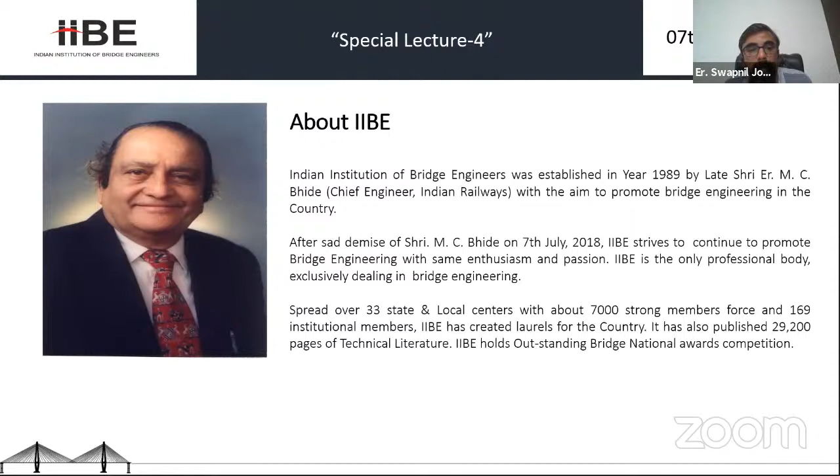Let me introduce our DG, Director General of IIBE, Engineer DG Divte, who graduated in Civil Engineering from College of Engineering, Pune in 1974. Through the 1975 UPSC exam, he joined Indian Railways Service of Engineering as a Class 1 officer and retired as Principal Chief Engineer of Indian Railways in 2011. During his service, he worked on many important railway infrastructure projects, occupying posts such as Principal Chief Engineer of Northeastern Railway and Southwest Railway, Director and Board Member of Konkan Railway Corporation, Chief Engineer of Konkan Railway Project, Chief Project Manager for Tunnels of Mumbai-Pune Expressway, and Project Director of the Katra to Loli portion of the Udhampur-Baramulla J&K Railway Project. Recently, he worked on Mumbai Metro 3, a 33.5 kilometer long, fully underground metro construction project, as CGM.

So we have great support from the DG for all these lecture events happening regularly. Let me introduce our President.

now. So the content of the presentation I am presenting here today: we will take a look at types of stay cable bridges, different types of decks that are used on stay cable bridges, erection possibilities of these bridges, stay cable systems that are being used today, important requirements for such bridges, and we'll also look at the construction series, and then we'll conclude with inputs from all moderators as well.

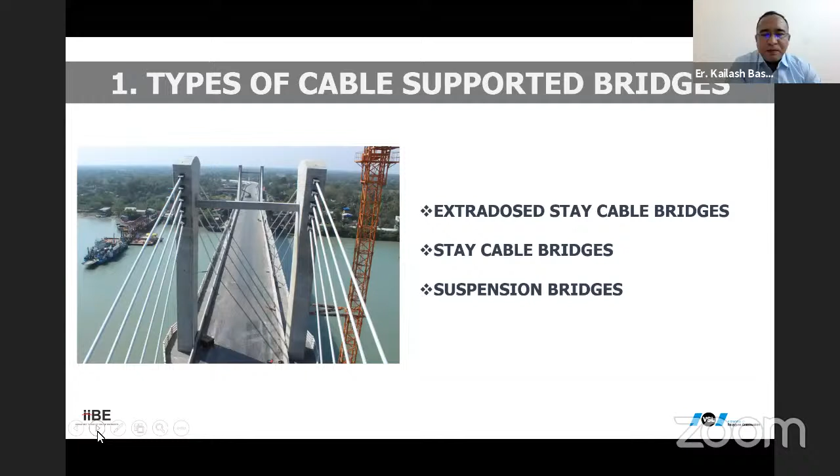Internationally popular is the fib, the most widely adopted standard today: Acceptance of stay cable systems using prestressing steels, fédération internationale du béton. Recommendations for stay cable design, testing and installation from PTI, the Post-Tensioning Institute. The French Interministerial Commission is also in vogue. Recently an IABSE bulletin 17 on extra-dosed bridges has also been published. So this was also nice to move ahead on stay cable bridges.

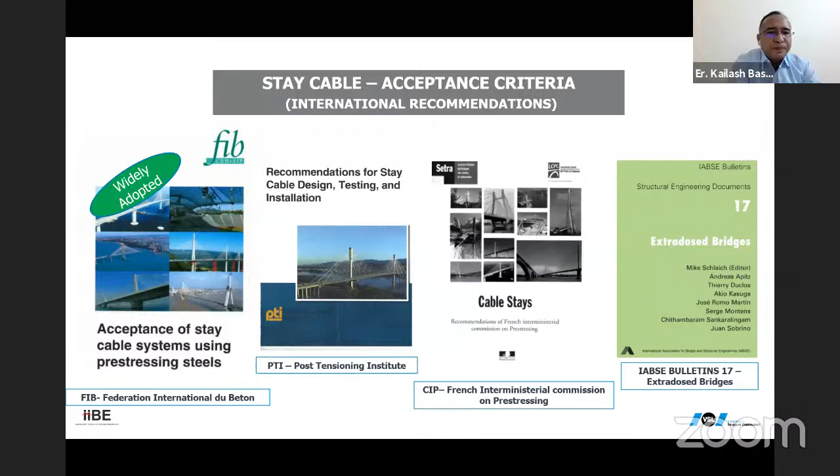Types of bridges: girder bridges, balanced cantilever bridges, which were quite popular for quite some time in the country on river spans, the conventional way of building. Variable depth, internal and external prestressing can be used, but they have a span limitation. Then come extra-dosed bridges, which are in between. They can span a bit longer. The stay cables here are treated as external prestress, maximum stress 0.6 fpu. Constant or variable depth is possible, but they also have a limitation on span length.

Then comes the stay cable bridge. Virtually, it can go quite long; there are more than a kilometer being involved now. After that come suspension bridges, which have no limit, though feasibility of foundations and others must be looked at. Constant depth, there could also be variable depth. For cable stays, maximum cable stress here is 0.45 fpu. Here the cables support the deck; it is not treated as external prestress.

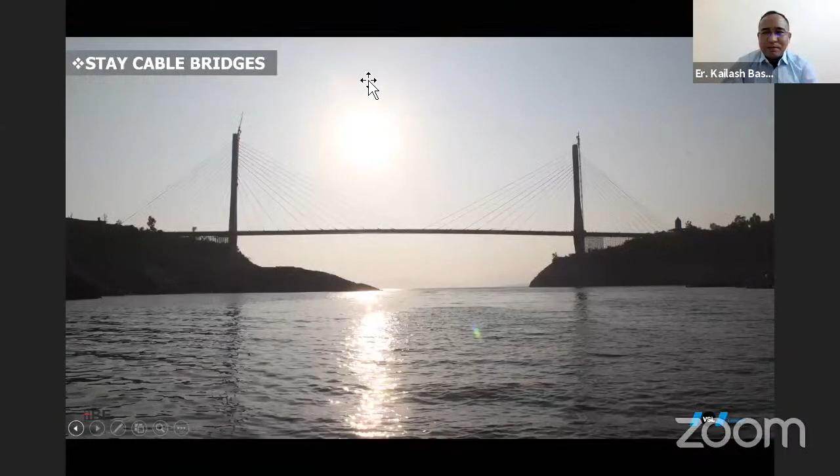Okay, I would try and restart. Sorry about that. Yeah, to the connection. We can start from here. I think this is okay.

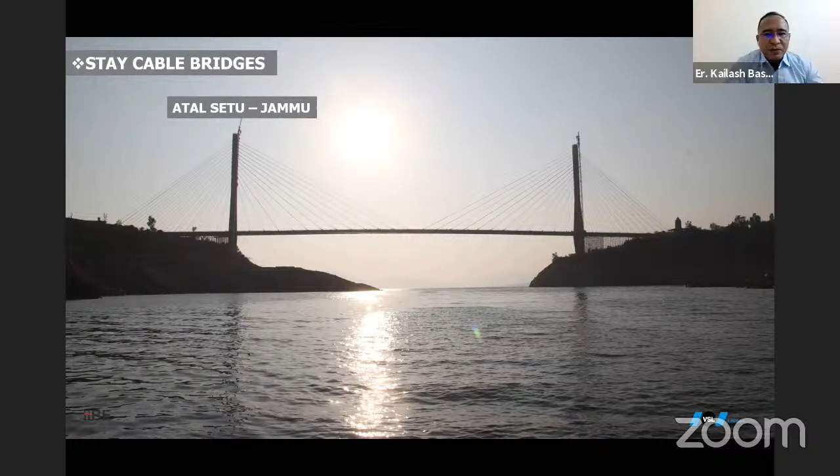Another stay cable bridge, a beautiful bridge being built in Telangana, under construction. You can see the Karimnagar Bridge, also spanning a river. Limited application in India, suspension bridges, covered here for reference. This is an industrial bridge. It is a coal conveyor bridge in a hydropower project in Northeast India, built also with a span of around 100 meters.

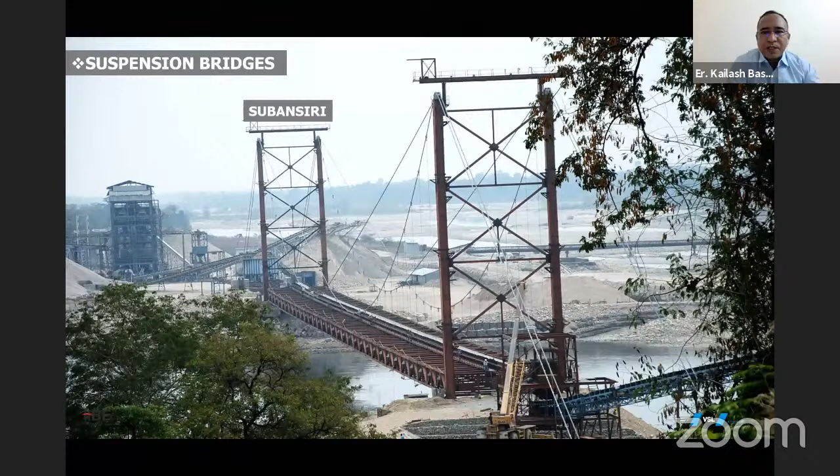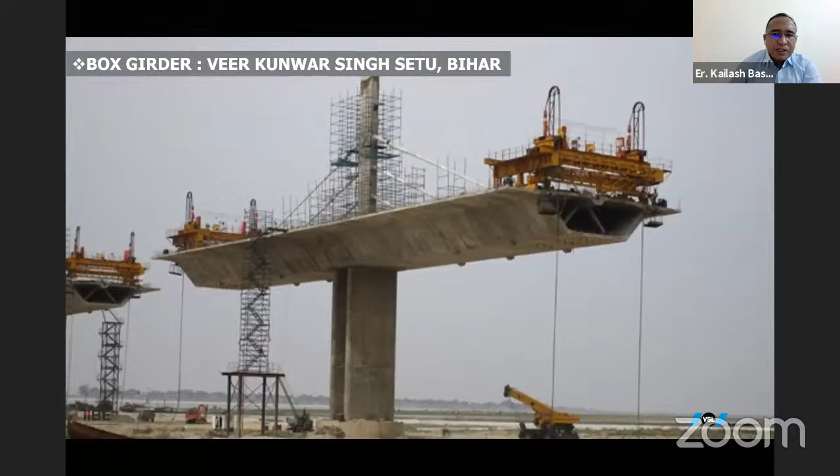Another box girder, the difference here, the stays are on the side. So that's also sometimes necessary where you have a 2-lane bridge, then you cannot put a stay at the center, as was evident in the previous slide. You can see here the stay is at the center. That's a 4-lane configuration. It's quite possible to divide the deck into 2 defined carriageways. Here, for convenience, for comfort, the stays are on the side. So stay box girder is relevant. However, here definitely to transfer the force, there has to be a beam at the center of the box girder, of a box girder bridge construction.

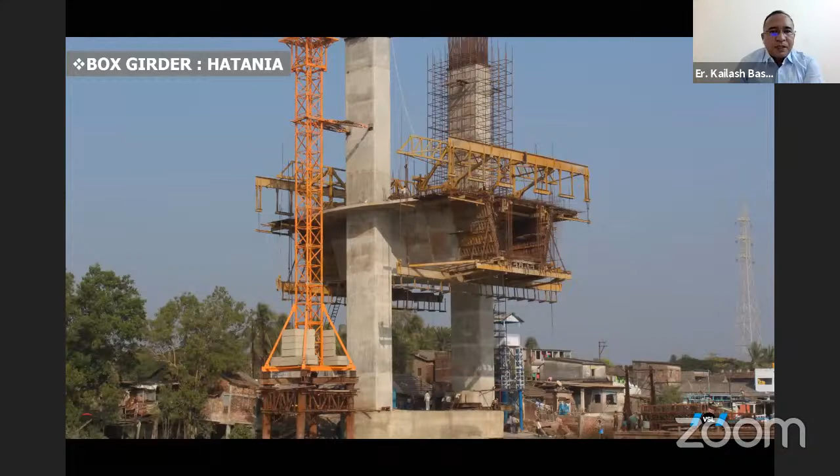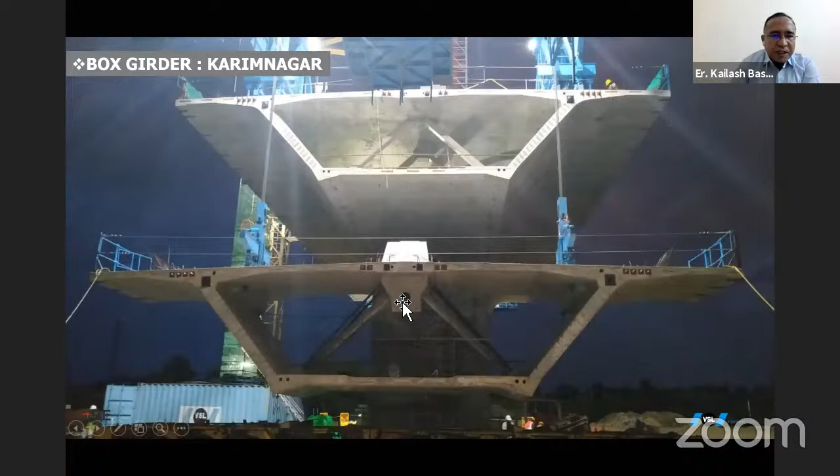So another box girder bridge here, Karimnagar. So you see that was an extradosed application. Here a concrete box girder on a stay cable application. Quite wonderful how a uniform cross-section of a concrete box girder spans a long span of 200 meters as well. So here is an example of a wide bridge. Central stays. Here you can see a cross-sectional photograph of a similar bridge. The external post-tensioning around the strut, recompressing the strut to take the tension from the stays. Quite an ingenious idea.

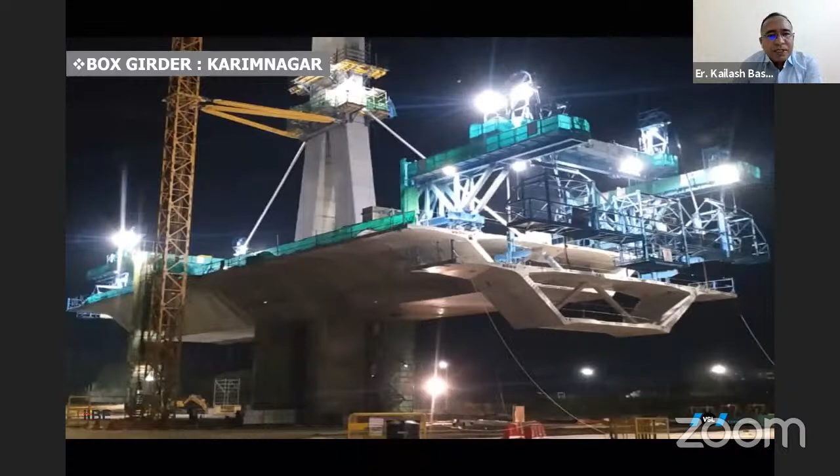Here is the box girder view during lifting. It's still the same way on a classical cable stay, uniform box girder. We earlier saw a classical extradosed bridge using a similar box girder. Here is a stay cable using a similar box girder as far as application is concerned. A unique bridge structure, U-girders. U-girder, very difficult to introduce stay cable. Here a unique girder designed by Systra in Mumbai. U-girder stay cable bridge. So you can see the deck is shaped, stays on the side. It's used for a metro train.

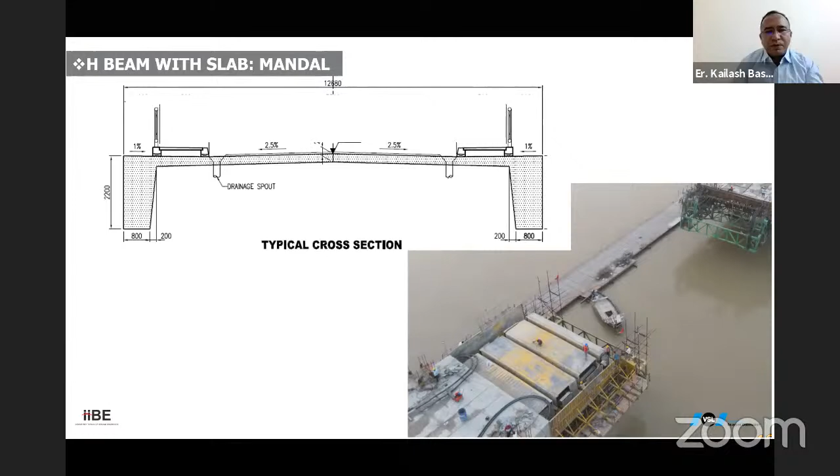Oh, I think we have lost Mr. Bassista once again. We'll have to wait for him to come. Yes, sir, we can request him to mute his video so that he'll get a little bit better bandwidth. Okay. He has to come back for that, right? So we'll wait for him to come back. Yeah, he's there. He switches off the video, but can he still make the presentation? Yes, he can. Okay, good.

Mr. Kailash. Hello. Suggestion for you, in case your bandwidth is low, you can switch off your video, but still you can make a presentation. Yes, sir. I am actually on Wi-Fi, but there are some problems, like inevitable rains in the area, so it's unstable because of the rain. I think now we can hear. You can go ahead, Mr. Bassista. Okay.

We could. Do you need me to go back a couple of slides, sir? No, it's all right. I think you are here. You are here. You go ahead. I think you already explained this.

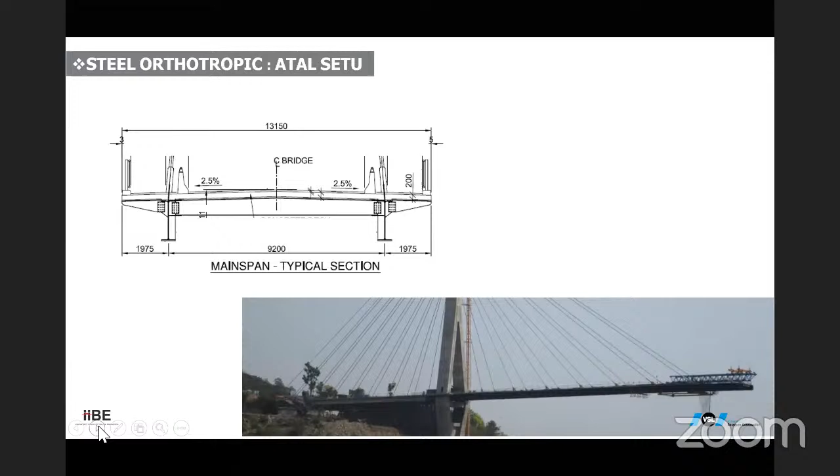Okay, so steel orthotropic deck example here of a stay-cable bridge where the backspan could be concrete. This allows you to go further, increase the span length, using a steel deck. So that's an example of a steel orthotropic deck. Here you could see very clearly that the backspan is in concrete and the main span is in steel, so that you could go a longer span.

We are looking at now, next, how to erect these kinds of structures. These require some special erection possibilities.

Am I still audible and available? Yeah, you are. Carry on.

Thank you. Sorry. Okay. So we are looking at various erection possibilities of such structures: form travelers, types of form travelers, kinematics, cycle time; lifting frames, the types of lifting frames, kinematics, cycle time. Special kinematics are sometimes necessary. We can take a look at that. Incremental launching, we can touch base on that as well. It's quite a possibility for erection of these.

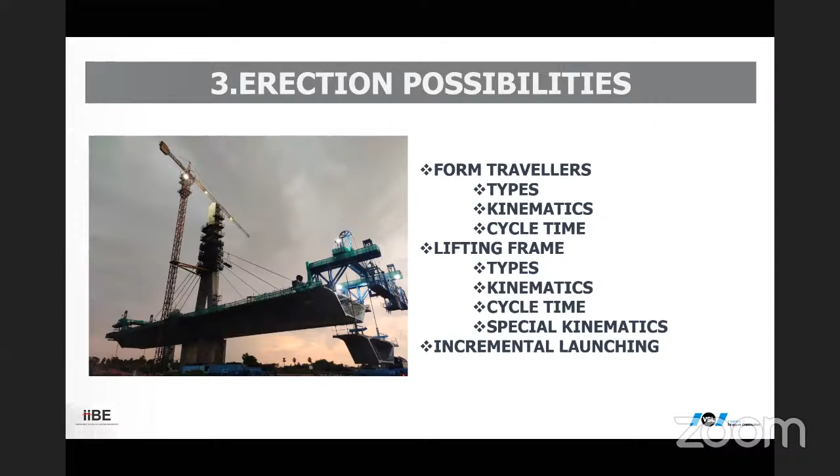Form travelers you can have in U-girder configuration. So that's a U-girder form traveler in use. So U-girders have a top truss or a top beam traveler with the traveling form under it. We will see the kinematics of this kind of form traveler soon.

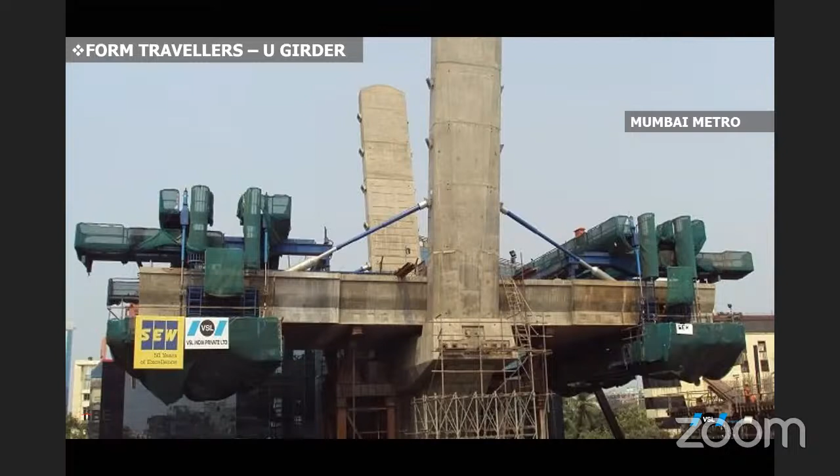So we take a look at form traveler kinematics. Generally, the traveler will have a few important considerations. There is an important diagram which is the crux, the most important factor holding the form traveler as it keeps erecting in cantilever. We start from casting of the segment to casting of the next segment. Once the segment is cast, you put the PT and other stuff taken care of, and the concrete has achieved enough strength.

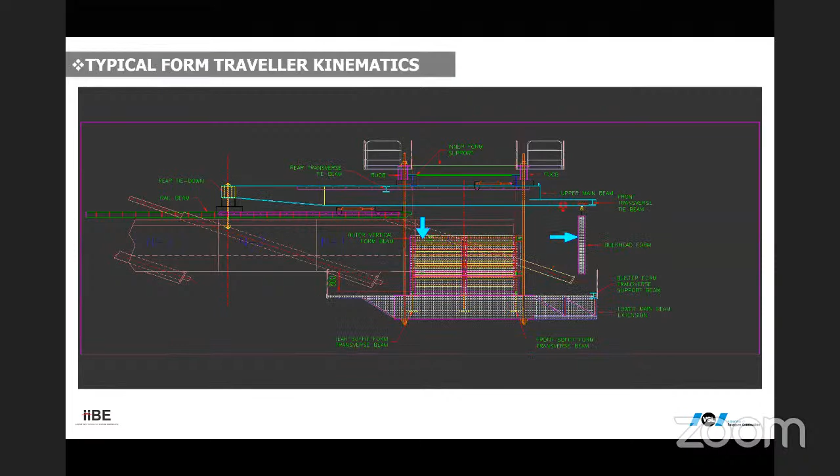You lower the formwork of the traveler. Once that is done, you could move the traveler back, which would move the formwork. Here, the interesting part is, since the formwork is suspended from the top, it gives you a helping hand to act as a counterweight for you to travel. You see that the form has been lowered. Now it has been moved back to act as a counterweight.

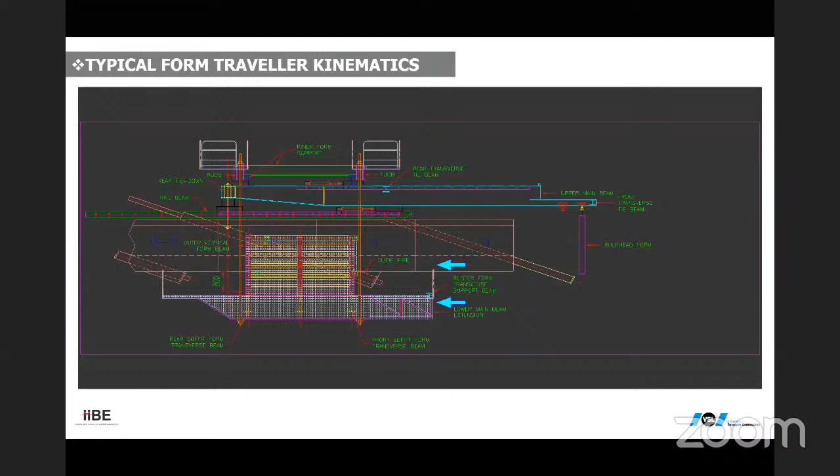Once the counterweight is in position, which is the formwork itself, you could launch the main beam forward, and then you could launch the rail beam forward. Once the rail beam has been moved forward, you can move the entire setup to the front. Now we have reached the next position. The counterweight is in position. You could install the tie down that is needed at the back, and you could move the formwork forward.

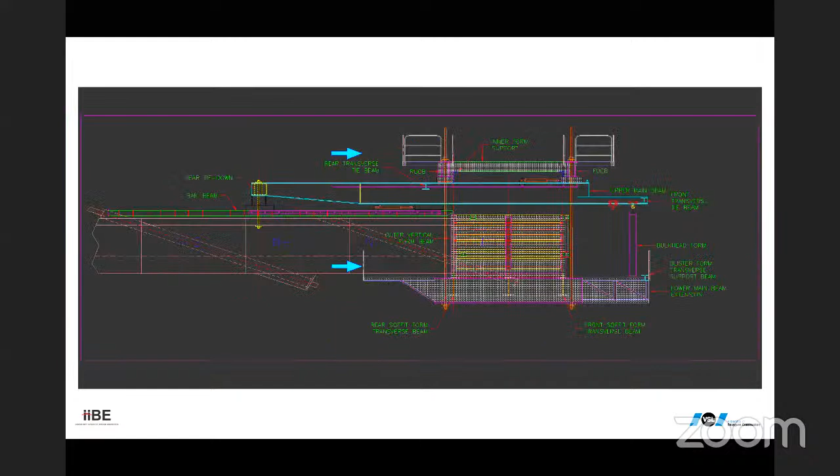The tie down has reached the requirement for the counterweight, and so now you could again go and take your cantilever. You could cast. This is typical of form travelers. You could adapt a similar scheme for various types of form travelers. There could be different form travelers than this typical one as well. And then you are ready to cast your segment after setting up the formwork again.

So typical cycle times with these kinds of travelers could be different for different circumstances, but what we would like to achieve for a faster construction would be as below. So for a segment with stay blister, reinforcement could take a couple of days, a couple of shifts. Formwork closing, concrete a shift, curing and installation of strands could take some time. PT installation and stressing, half a shift, can be done quickly. Launch form traveler and setup in half a day. So probably in 5.5 days, you could achieve a segment.

But with the stay-out blister, you can have reinforcement in a similar way. Close the formwork and concrete. You could have curing, install the strand, lower and launch back, install and stress stay cables. This is an important activity that gets added, because of 2.5 days for stay cables. And then finally, you are able to launch the formwork and set up again. So that's 8 days. So you could see it could be 14 or 15 days maximum for a couple of segments, stay to stay, as the stays are mostly on alternating segments on such structures.

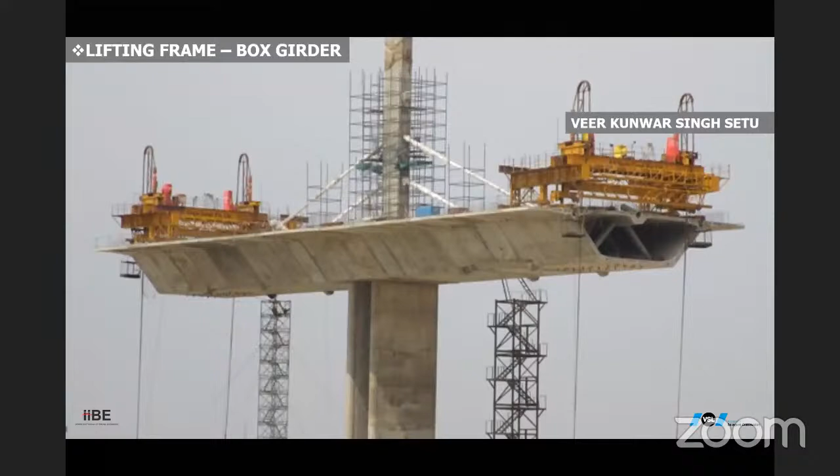So now we look at a lifting frame. Lifting frames, various types of lifting frames. Lifting frames could be devices. They work also in cantilever. They lift the load in cantilever. So various types of lifting frame. The principle remains the same. There is a top truss, which is capable of lifting the segment at the forward cantilever and then attaching it to the completed deck.

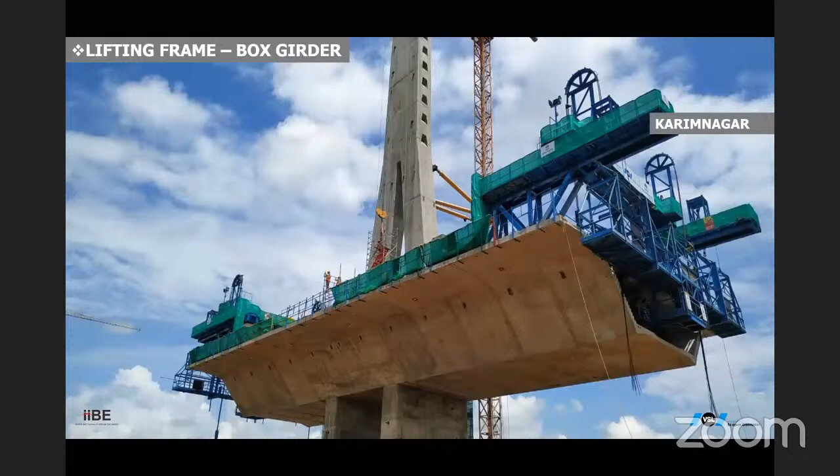So here are a few examples of box girder lifting frame. That's an example from a very large lifting frame. The segment weight on this job itself is about 400 tons. So that's a large lifting frame.

So as you can see, lifting frame, we can look at kinematics. Unlike the form traveler, it does not have a formwork which could be slid back or forward to act as a counterweight. Hence, such lifting frames would need a counterweight of its own. Many lifting frames are designed without counterweight as well, but the stability check of such lifting frames is very crucial to ensure they are safe.

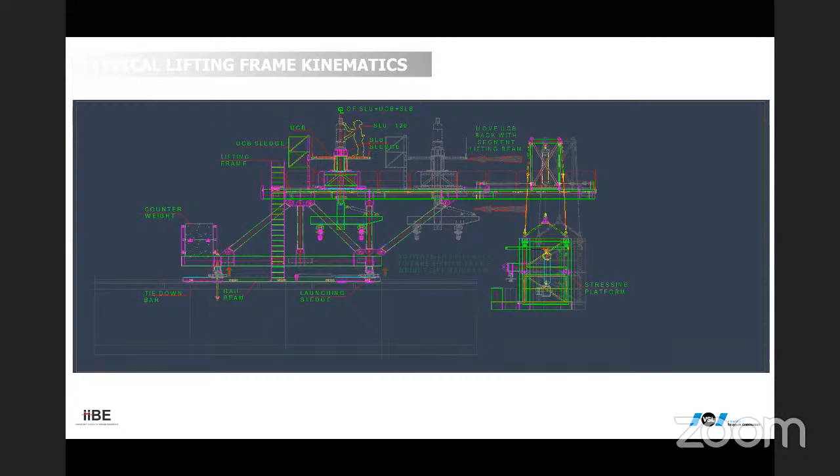So we take a look at kinematics here. It's quite a simple one. You activate the lift-off jacks, free the rail beam. You could walk the rail beam forward. This could be done in various stages now. This could be 1 meter at a time.

Then you lower your lift-off jacks such that the lifting frame is lowering onto the rail, and you then launch the lifting frame over the rail beam. By moving in these steps, you could achieve the launching of the lifting frame from the rear position to the final position, in which case you are now ready to take your tie down installed, and then you are ready to lift the segments in the cantilever to continue with construction.

So here, important, a quicker method. Of course, you could see immediately it takes a lot less because the segments are precast here. You're not into in situ construction like form travelers. So here you would spend a total of 1.5 days or 3 shifts for a non-stay segment, and then about 3.5 days for a stay segment.

So totally what you achieve on a form traveler in 14 or 15 days' time, you could achieve probably here in a 5 or 6 days period. But segments have to be precast, and also the segments have to age. So definitely the age of segments has to be considered, which has to be approximately 30 days for precast construction.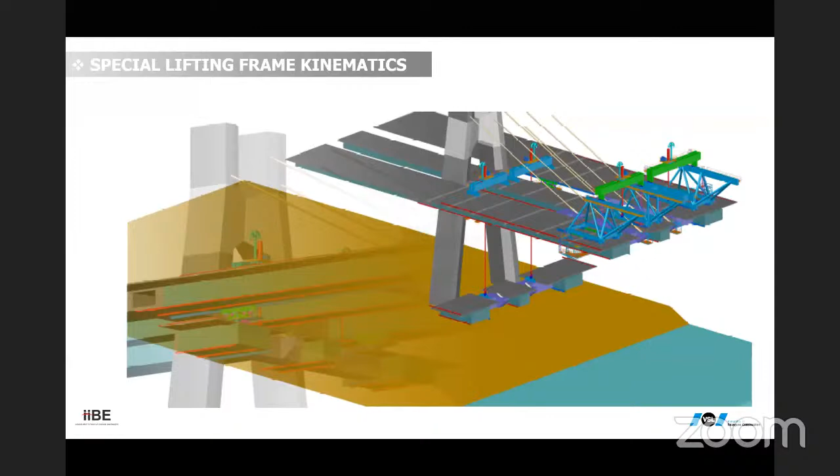So here, the idea is to supply the segment at one location, on the pile cap. So here you could see the segment has been supplied under the pile cap in the shadow of the bridge already being built. There are under beam trolleys that lift up the segment. So in this view, you can see the under beam trolley has lifted up the segment. This trolley is capable of traveling under the bridge with the segment suspended and is able to deliver the segment to the front lifting frame.

For a lifting frame, it is the general idea of picking from ground, but this segment has been delivered by under beam trolleys, which help the segment to reach its destination. And the segment is handed over to the lifting frame, the special lifting frames. The segment is brought forward and it is attached to the structure. So that is also quite a special application. These could be integrated into the design.

We are looking now at orthotropic lifting frames. The working principle remains the same. However, here the segments are steel, so steel beams or something. They are bolted, and the construction is done as modular construction. They are prefabricated in a steel fabrication facility, brought to site, launched forward, connected the same way. Here, the interesting part is that these beams can be delivered from the back.

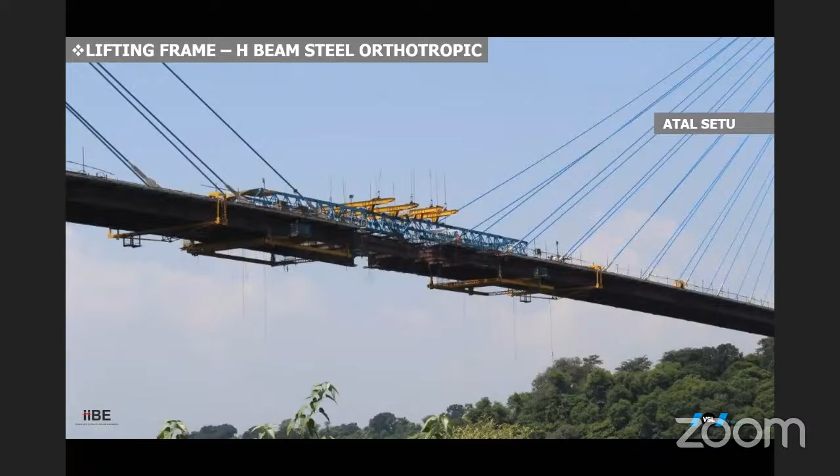So there you see an example. The steel beams, you can see on the deck there, are parked, ready to go. These beams are already parked, and the traveler there will always use these beams to launch forward. So in such cases, in the launching time cycle, we have to launch the lifting frame to do the I-girders bolting, combining them with the existing deck.

Shutter fixing; if not steel orthotropic, you have to definitely concrete the deck. You could use precast panels. However, in this case, it is a concreting operation. So you have to concrete it, you have to achieve strength. So probably in a 2-week cycle, you could proceed with a segment. However, point to be noted, these decks could be anywhere in the range of 11 to 14 meters long, compared to concrete stay cable bridges or extradosed bridges, where the deck pieces are 3-meter box girder pieces.

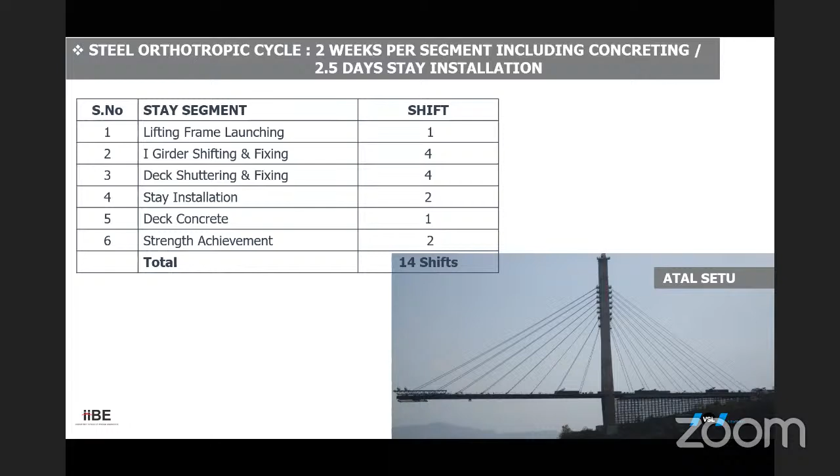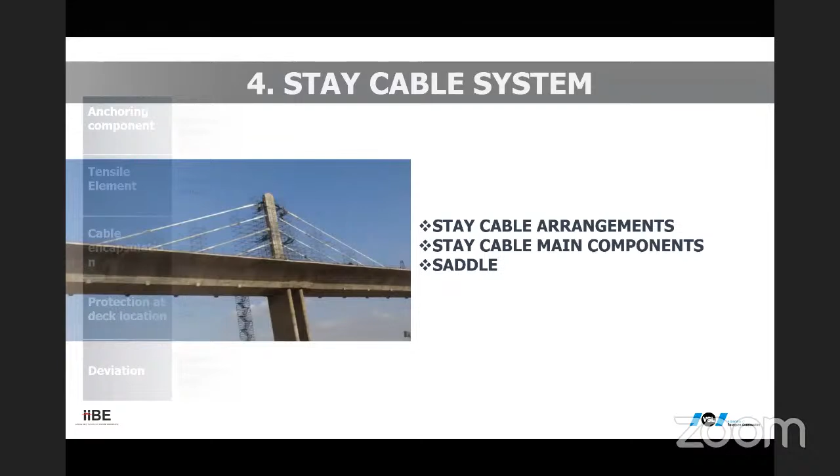So we move on to an important topic, the stay cable system. What stay cable system should be or could be used. There is an example of the stay cable system. So there are various components, but the arrangement remains the same. A stay cable system is nothing but a cable that is locked at both ends. One end could be on the deck and one end on the pylon, or both could be on both sides of the pylon, in which case you need a saddle to straddle the pylon.

Anchoring component, you could see from the top, we could start from the first topic, which is deviation. So vibration and deviation load control. There is a bottom item. Anchoring component, load transfer to the structure. We have to have an anchor nut to adjust the tension force. There's a main tensile element, which is strands, the prestressing strands, which carry the load. There is, of course, a special requirement, corrosion protection as well as encapsulation.

On the encapsulation, there are various levels of corrosion protection requirements. These are exposed to the environment, so definitely you will need a high level of corrosion protection. These are galvanizing as well as PE sheathing. Protection at deck level, you have to make sure that the plastic is not exposed to vandalism. So definitely vandalism, fire, blast, accidents, incidents could take place. So anti-vandalism pipes are needed. And there are various other items that we see in the next step.

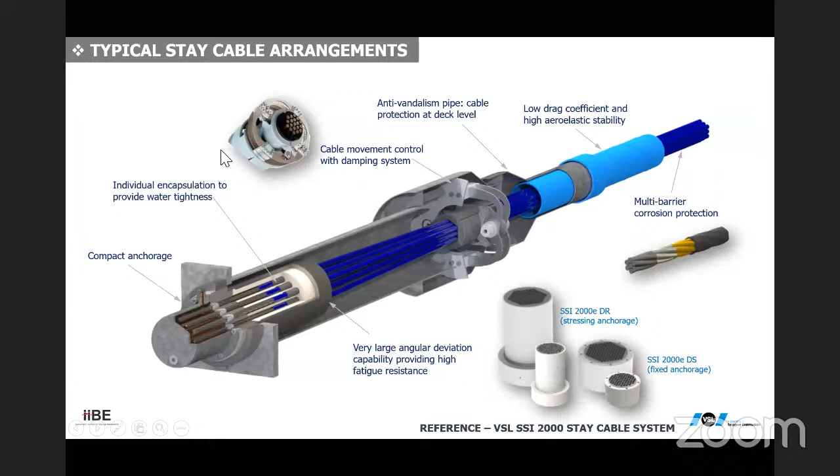So that is how you provide corrosion protection on such a system. Anchorages you could get in various types. So these are special anchorages for stay cable projects. Here now a pictorial view, you could see actual pictures of these components, how they look. That's a strand, as we said, the main tension element. Of course, you can see the galvanizing. Then there is wax filling in the interstices. And then there is a co-extrusion of HDPE.

Anchorages, that's a live end anchorage with an adjustment possibility. Here, the lock nut, we will see how this lock nut functions. That's a dead end anchorage. That's only for locking. You need guide deviators, tension rings. These are to make sure only a certain amount of deviation enters these anchorages.

If you have end-to-end anchorage in the deck, then at the pylon you will need a certain deviation. Either you could do it with a pylon link unit, a steel transfer link unit embedded in concrete in the pylon, or there could be a saddle where the strands will straddle over the pylon, with one continuous strand traveling from one end of the deck to the other. The HDPE pipe, as we said, is a special HDPE pipe, and that's also one of the components.

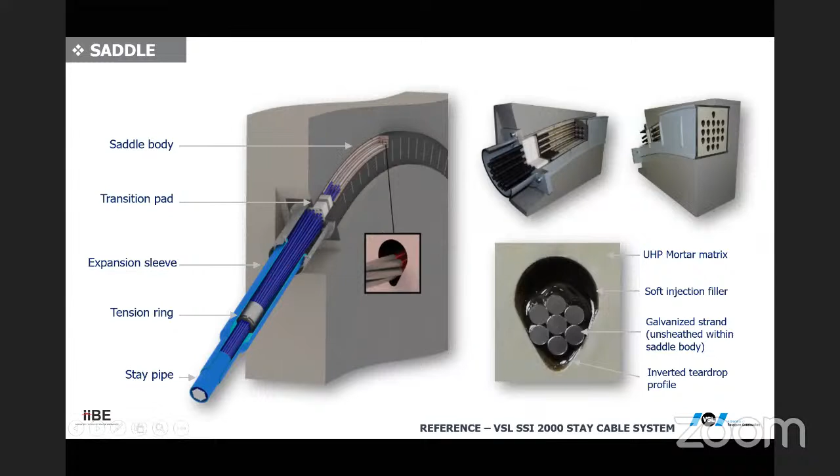What we see here is how a pylon will straddle these strands with the help of a saddle. Here you see a pylon cross section cut for view. The saddle is placed inside, and strands enter from one end. There are special devices to move them towards the other end, and you can see various patterns available in the middle. The view here is an inverted teardrop shape, which provides the friction inside the saddle at the pylon location for the strand cable to be stressed.

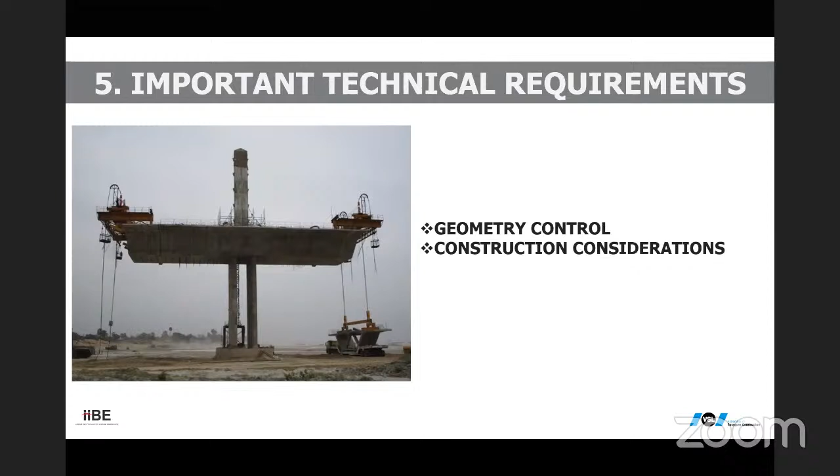Now we come to important technical requirements for such bridges. Geometry control and construction considerations are quite important topics.

What is geometry control? Construction drawings show the geometry of structures in an unloaded state. Real structures, however, will deform under applied loads—self weight, superimposed loads, live load, etc.—depending on the construction method and sequence used. Hence, a structure built strictly to the geometry described in the construction drawings will have a final shape differing from the geometry shown, because you need to account for all these construction stages. The purpose of geometry control is to assess the applied load and the chosen construction method and sequence, and to propose corrections in order to achieve the shape described on the drawings.

Geometry control can be broadly structured into three parts. We start to get a bit more technical from here: theoretical alignment, stage by stage analysis, and construction stage. In a bridge, the theoretical geometry describes the horizontal line, vertical line, and super elevation—also known as the theoretical alignment—and does not consider construction method and sequence.

The theoretical alignment is the target geometry—that is, what the bridge is wished to achieve.

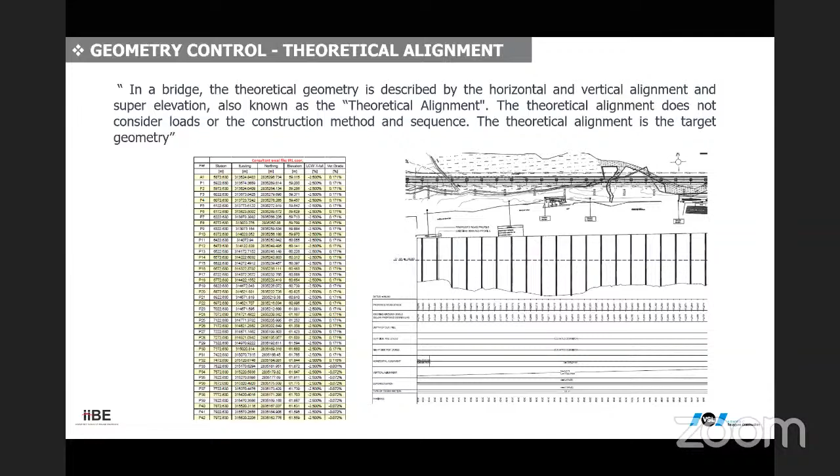Stage by stage analysis, known as pre-camber calculation, assesses the various deformations of the bridge due to load, construction method, and construction sequence. This is done by virtually building the bridge with the help of finite element design software according to the proposed construction plan, applying the loads acting at various stages of construction. Deformations of the bridge are calculated for each construction step. The aim is to define the required vertical and horizontal camber of the bridge in order to achieve the theoretical alignment at the end of construction.

It is important to note that this theoretical alignment is only for one particular structural and loading state, because it is specific to that loading state. Variation of loads or construction sequence changes the deformation and hence results in a different camber. Furthermore, most construction materials have time-dependent losses and time-dependent deformation, even if loads are not changed. Hence, the theoretical alignment on such bridges can be achieved for one point in time only.

So it is very important for the designer to define his theoretical alignment in terms of time—whether he expects it at the end of construction, or years, or 5 years into the life of the structure. Accordingly, these things have to be worked out.

To work this out, the cantilever is constructed first without camber. Here, a case is presented where the form traveler is constructing this deck. The casting curve is equal to the theoretical alignment, meaning each new segment is cast against the deflected cantilever end.

Once this is done, the camber is calculated. Camber is basically made of six components: deformation, and rotation in the Y and Z directions. However, we are more concerned about the vertical camber, because deformation in the horizontal direction and torsional direction are usually of small magnitude—there being no significant differential in the horizontal direction keeping the limit, and hence it is of little concern.

Camber is taken from deformation after completion of construction. Pre-camber is then added to deflections at every stage to obtain a control line for every stage. In reality, the bulkhead of the form traveler is set to the theoretical pre-camber, because the goal is to achieve the theoretical alignment at the end of those stages.

So once this is done, this confirms that finally the deltas we are introducing at every stage allow us to match the theoretical alignment at the end of construction, or at a defined time set by the designer.

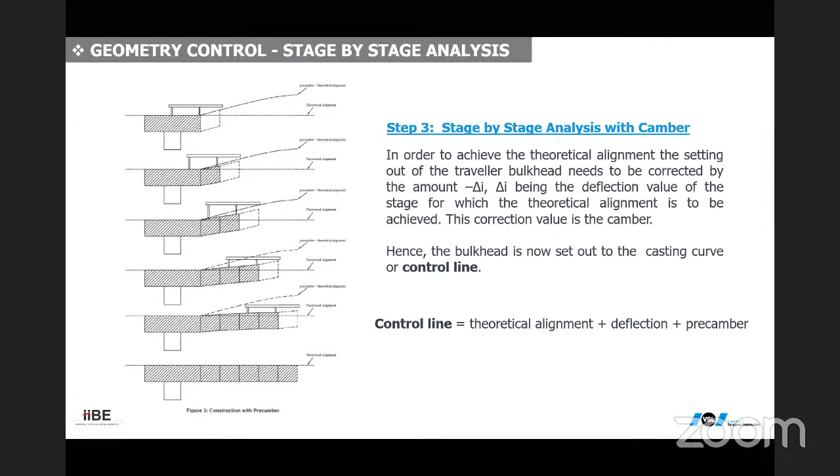So that's the control line, where the theoretical alignment plus deflection plus pre-camber has been taken into consideration. That control line is of maximum importance for construction of bridges. You can see the sag and uneven connection of free cantilevers. The idea is to provide pre-camber on the bridges.

To pre-camber the bridge, we need to calculate deflection and deformation of bridges: creep and deformation, permanent load, shrinkage, time-dependent strain in unloaded condition at constant temperature, pre-stress losses, draw-in relaxations, friction losses, and the construction process.

This is very important to define at that stage: what would be the construction process and the actual chronology of construction. Materials also need to be defined, including what the material and temperature effects will be.

Cast-in-situ segments and precast segments will have a different pre-camber. So you need a similar principle but a different method of construction, and on that basis you would arrive at a pre-camber value.

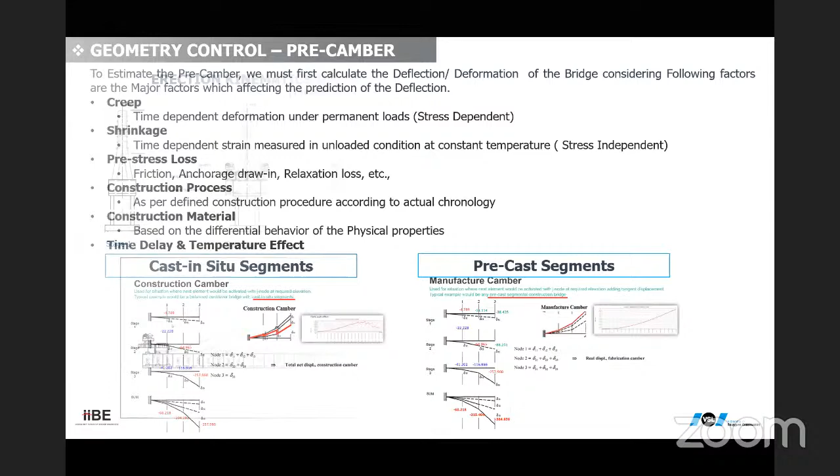To come up with deflection for various stages of construction, that's the deflection tree. It is important that this considers pre-camber as well as deflection, time-related, and time-and-load-related deflections.

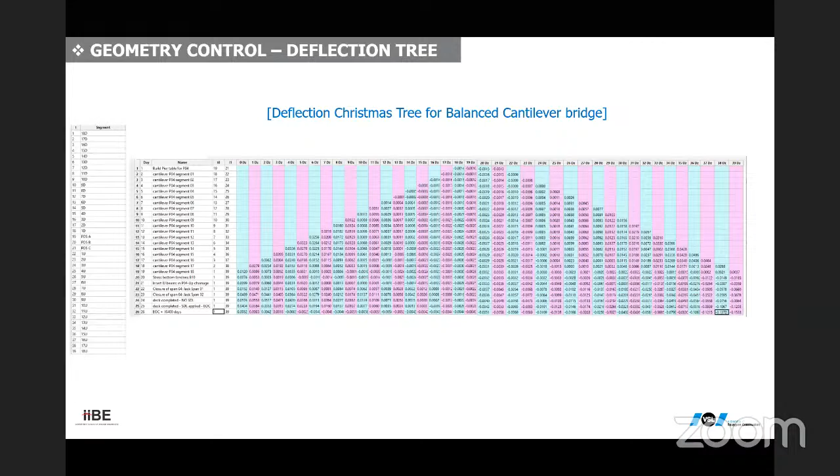Once this is worked out, you also have the deck and pylon coordinates to consider. Construction must account for these, as they are always in a dynamic state. These need to be carefully calculated, as well as the length of stays and the angles of the stays.

Hello, I think Mr. Bassista has gone off again. Sorry for the interruptions, everyone, it's not in our hands. We'll have to wait for Bassista to come back. I hope he's coming back. Deepika? Yes sir, he is joining. Yeah, he joined. Hello, Mr. Bassista, you're okay now, sorry to unmute. Okay fine, carry on, I unmuted. It's okay, now? Yeah, okay please, thank you, carry on. You can go ahead. Hello? Yeah, you can go ahead, my slide got stuck. It's not moving, is it?

Okay, so geometry control, stress— no, now it's fine, I think, okay fine, see.

Okay, so geometry control and stressing. As you can see, the stage stressing sequence and stay force at every stage need to be established along with the deflection tree, the construction sequence, and stay forces—everything needs to be monitored.

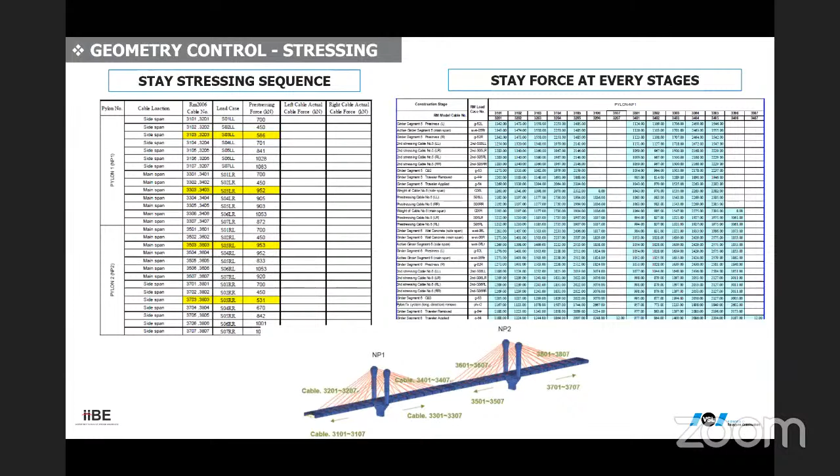In the world of technology these days, you have quite a lot of support. Here is an example of how software can help you with geometry control of a bridge. Here is a design software that can help you, called Geodes, where you could model the bridge.

It can help you through the construction of this bridge, whether you go for precast or in-situ. You can use Geocon, and finally you could use SMCon for the erection of the bridge, for geometry control—all on a single software platform.

This platform could move between all three stages, seamlessly connecting all of them. This helps in integrated construction of complex bridges, giving you control over processes that would otherwise be in different software, worksheets, or platforms—so these could all be integrated.

So we come to certain important considerations that we have to do on such bridges. Survey control points are very important on such bridges. Defined survey control points need to be carefully established at the start of the project, and those need to be referenced.

For every activity, for taking of survey and reporting of the survey. Here is an example of a survey control point, and how it should be set on a bridge deck. On a bridge with a central stay, you could offset the center line point for visibility. You can have more control points; many people would like control points at the bottom of the soffit also. This could be done for very high variable depth segments with height of 7 meters or 11 meters or more. We can adopt to that.

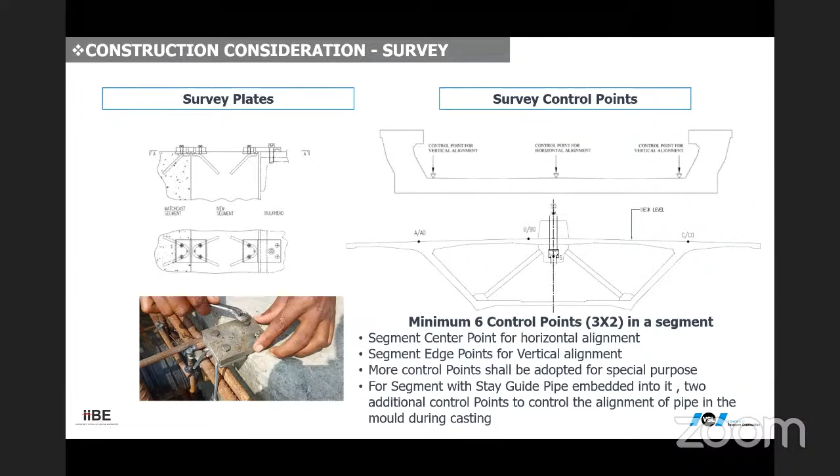Temperature effects. In general, there would be a large impact of temperature on the vertical gradient. In balanced cantilever bridges, the relative variation of deck levels between early morning to noon will show significant difference in survey reading. So it is always recommended that surveys are taken early morning, so thermal bridge movement could be neglected.

Survey towers in the yard should be constructed in concrete, preferably to avoid large deformation and movement. When exposed to sunlight, they must be covered to make sure there is less and less movement, less and less errors creeping into the control of geometry of these structures.

An important consideration is also, as per design, that such structures have to build one segment out of balance. Mostly erection is also done one segment out of balance; it's not possible to erect it exactly at the same time in balanced cantilever mode. So this is also something which needs to be checked during surveying or during execution of such large bridges.

So now we come to what is the construction sequence. It's a large, vast topic, so we are choosing one construction sequence, as many others exist. Pier construction, that's a normal stage. You have a pier table construction.

Pier table could be in various ways. This could be precast, this could be on bearings, this could be integrated connection. This is an example of that integrated connection.

Once the pier table is done, you would start with the pylon construction. Various stages of pylon, as you can see, pylon is constructed. First is the inverted Y-shaped pylon, so you meet both the Y ends. Start with the vertical positioning of the stay cable saddles. Final view of a completed pylon here.

At the pylon, we have various configurations on display. We start from the left. Here, the saddle is installed in the pylon. The saddle could be supported on steel frames adjusted for target coordinates. These need to be monitored and positioned onto the pylon.

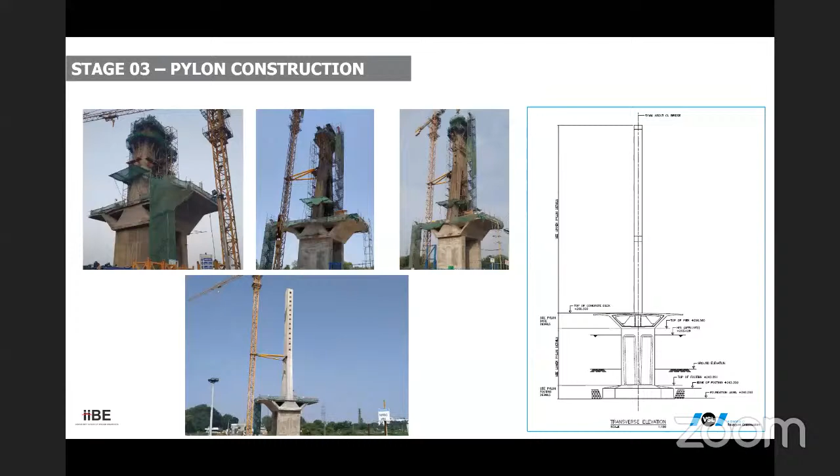Pylon link unit, as we said, this is a transfer unit rather than the strands crossing from pylon. Here, steel structure or pylon link unit does the job for you. In a typical case where you have a pylon with no saddle, but a dead end anchorage, or live end for that matter, could also be positioned. We have the crisscrossing of the stays.

Fixing of guide pipe bearing plate in deck. This you need to do at some stage. If it is precast, you do it in precast. If it is a manufactured steel segment, you could do it in the steel factory.

Direction into the main beam, two planes of stays or a single plane of stays. Direction into the main beam, as I said, above for open end, open section in steel, no stressing. Inside the box section in steel or concrete. Below for solid section in concrete. Here eccentrically into the main beam.

This is a different cross section into the cross beam in steel or concrete. Below wings, mostly this method. Inside the deck, this is interesting, coming from the center of the center stays inside the deck. Mainly adopted in extradosed span bridges. We now have an example of cable stay bridges using the same.

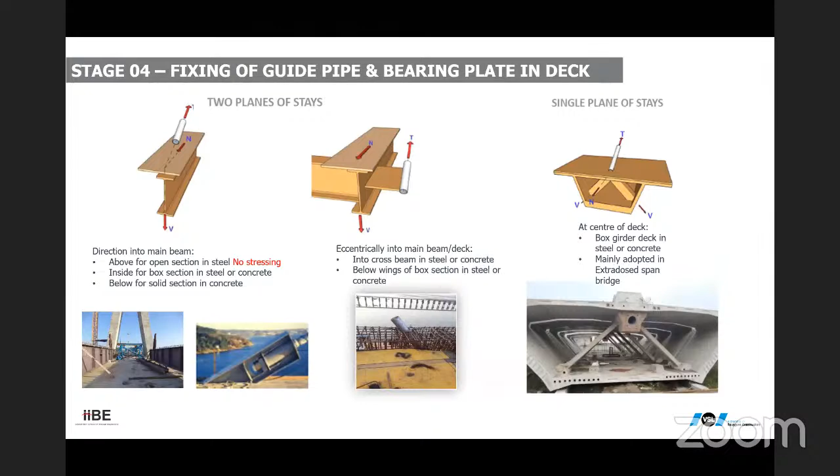Around the world it has been toppling as well as failing, so it is very, very important to have very good procedures, well controlled and explained to site people. Mostly these frames work in cantilever, unstable conditions. So the measures on such equipment must be 100% explained, checked, and inspected before handing over for use.

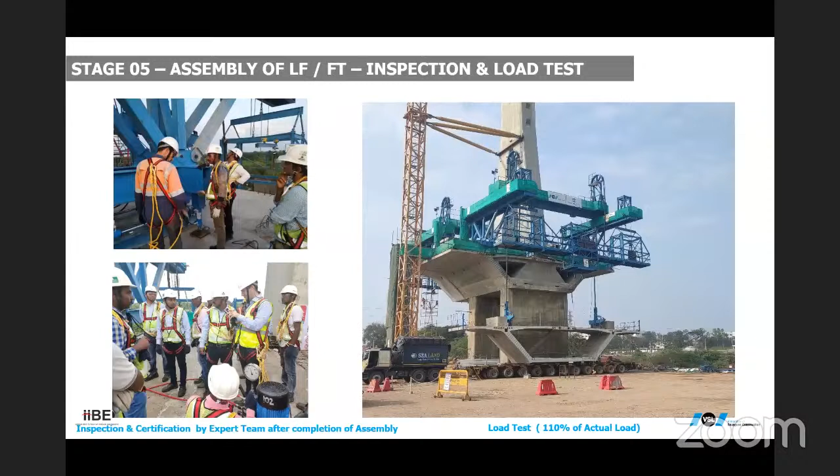So the frames are commissioned. You could start with stage by stage construction, cantilever construction in this case.

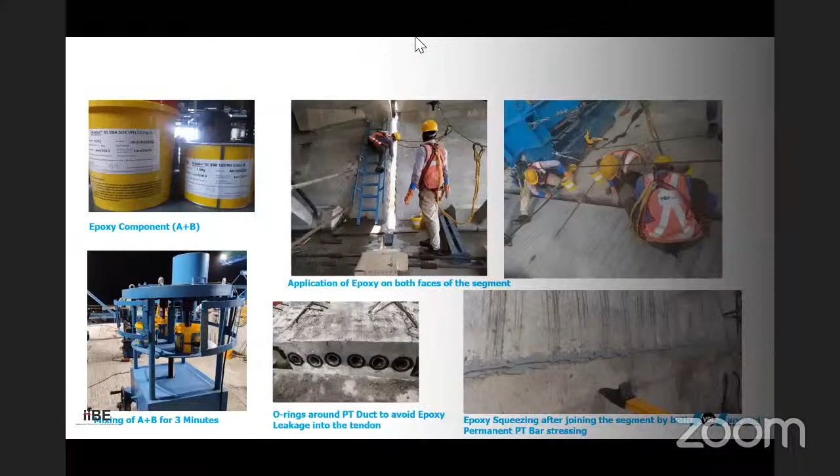Again, I think we've got a problem of this interruption because of the instability of internet. Deepika, I think we'll have to ask him to come back again. Hello? Yes, sir. We are really sorry for this. I can understand the plight of the participants, but we can't help it. And I think he has come back now, right? Yes, sir. He joined. Okay, Mr. Bassista, you can. Hello? Yes, sorry. It is happening repeatedly. It's monsoon. Okay. Fine. Carry on. Can you hear me? Yes, we can.

Okay, so the next step for this would be segment gluing. So we need to attach the segments. So there is an example of A plus B component. This is an epoxy mixing machine. So it's better to employ a good mixer rather than hand mixing. Epoxy application: safely apply the epoxy on both faces of the segment. Be careful, protect the PT. Epoxy sent into PT can be very damaging for the tendons.

So here is an example of how to avoid epoxy leakage. More advantages to using these products. So then finally we can see epoxy squeezing after joining of the segment. Here you can see stressing of the temporary PT bar, permanent PT bar. There could be sometimes application of permanent PT bars. Load transfer could be done once the epoxy has hardened.

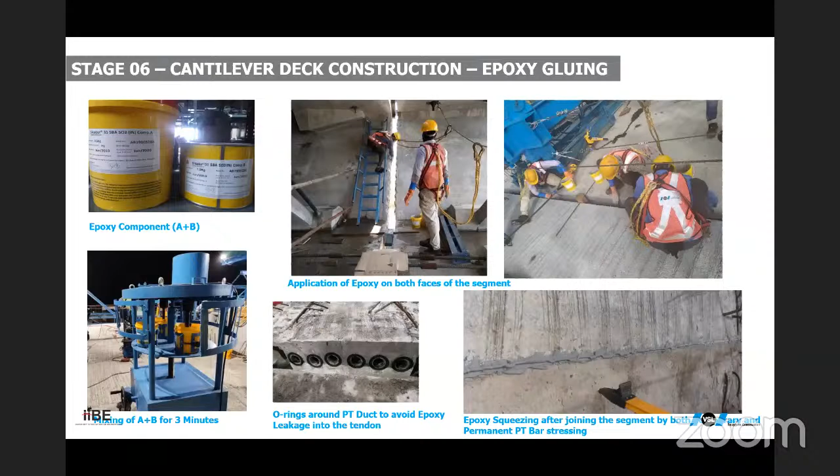Yes, again, there's a bit of problem. I think so. We don't have an alternative but to wait for him to come back. He's connecting back again quickly. There is some interruption. So he joined again. Hello? Hi, good. I'm back. Yes, please.

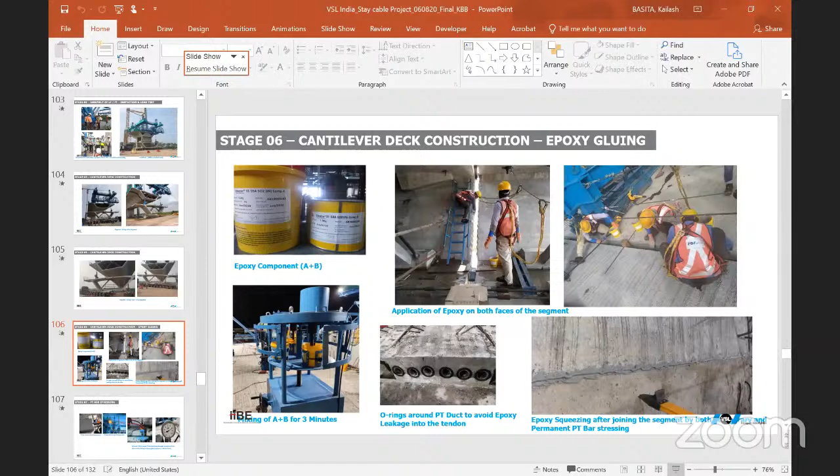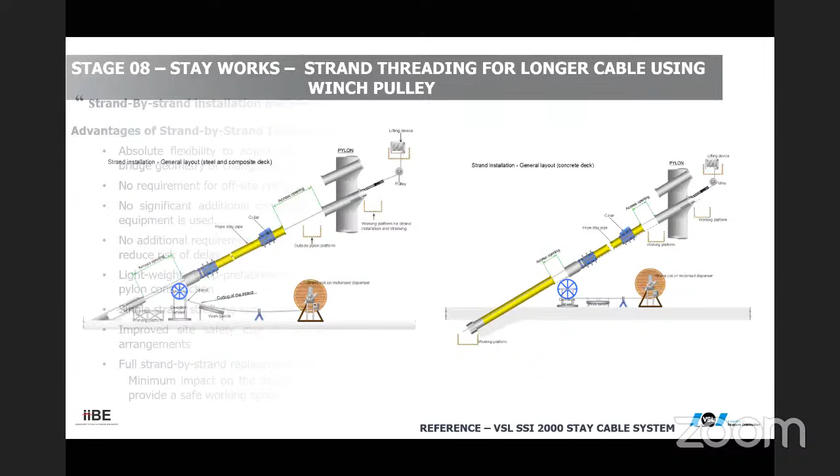So the strand by strand installation method is quite a popular method being used for stay cables, which is also explained in this presentation. It offers absolute flexibility to adjust stay cable length during construction for variations in bridge geometry or changes to deck erection. No requirement of off-site prefabrication facilities like the large locked coil cables or MSI cables used earlier. No significant additional construction loads on the structure as light and compact equipment is used. No additional requirement for tower cranes for cable erection reduces risk of delay.

Lightweight shop prefabricated anchorages can be installed during deck and pylon construction, unlike the large clevis connection or large anchor nut cables. Strand stressing with monostrand jacks for positive increment is very handy. Improved site safety due to reduced component weight, simplified access arrangements. Strand by strand replacement during construction and during service is available. Minimum impact on bridge deck traffic for replacement. Single lane closure is typically enough to provide safe working for replacement of these stay cables.

So here the stay installation and stressing is in action. You could see the stages. Normally, you would have a two-stage stressing on these kinds of bridges. One is during the installation of the stay, erection of cantilever. Another one would be after application of SIDL, which is the fine tuning. There could be more stages depending on the complex nature of the bridge, long spans, whether the span has been erected before the main span. Many factors govern such stages.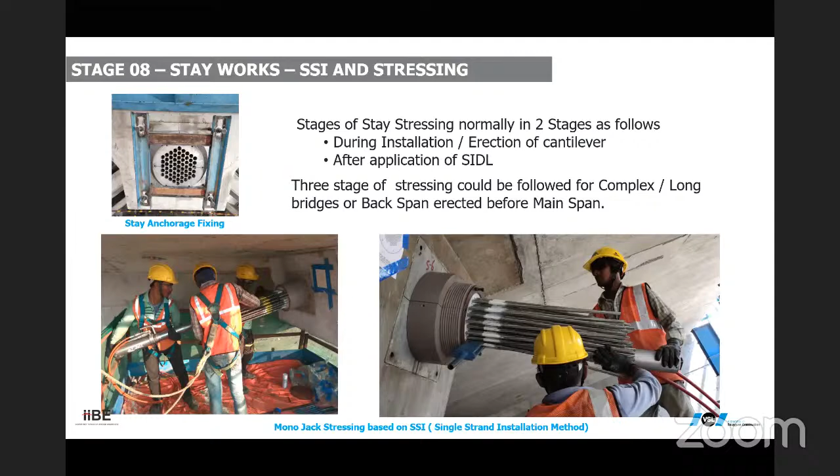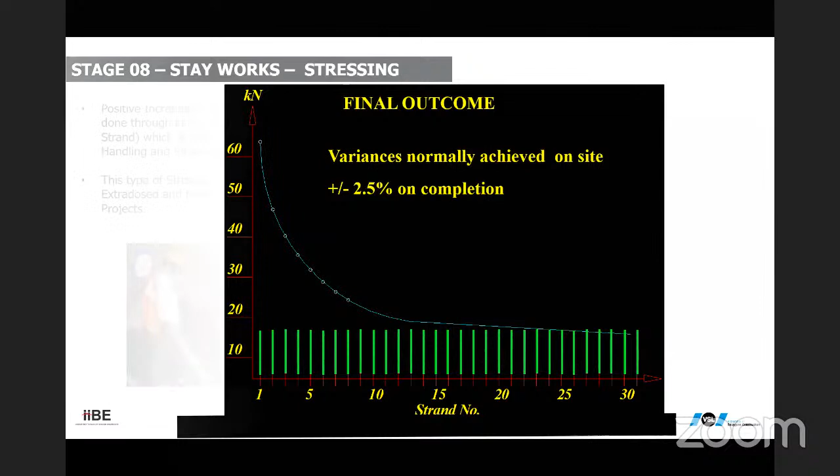Variance normally achieved on site has to be between plus and minus 2.5% on completion. This is demonstrated by liftoff. Positive increment stressing is normally very handy. The handling is quite easy. This can be done for extradosed or medium span bridges.

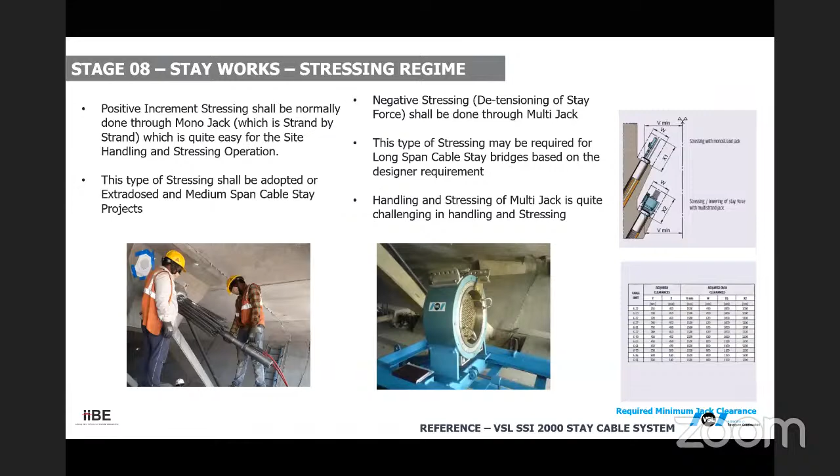Strong beams at the end of cantilever. Once the cantilever construction is completed, you would need a strong beam at the cantilever tip to match the deflection of both the cantilevers. And before casting of the closure pour, you would need the strong beam to also help you provide the jacking force which is necessary at the cantilever.

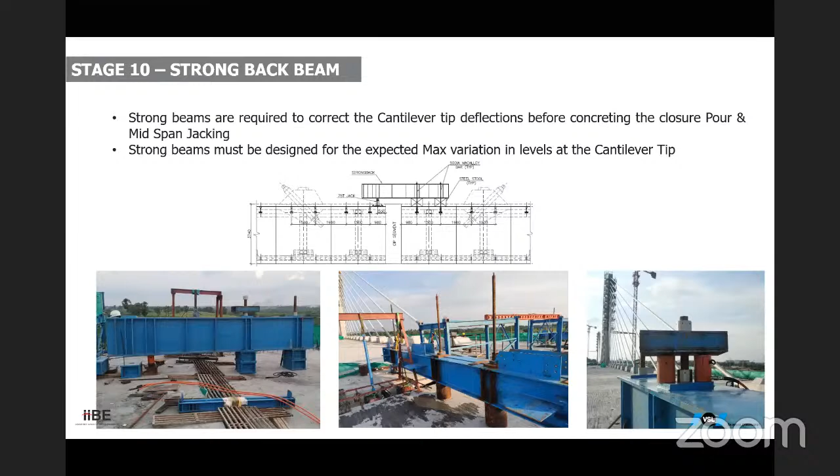So here is an example of mid-span jacking. This has to be done in case of a two pylon structure where you would need the main span to be under compression. So you provide an additional force at the center. This puts the main span under compression always. After that, you would cast the closure pour at the main span. The force could be designed as needed by the designer. In the pictorial view, the application of the force could be positioned at certain locations depending on the force.

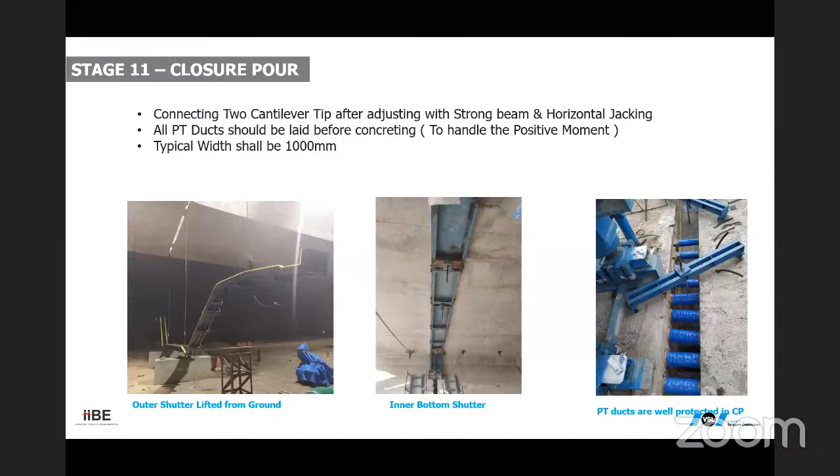Finally, you need a formwork, wet joint formwork. You need to interconnect all the PT. Once the PT is connected, you could pour concrete. The closure pour could be 1 meter in this case. Once the closure pour is done, we proceed with the SIDL, barricading work, and casting. At this stage, all the accessories are fitted, the blacktopping is done, the bridge is virtually complete, but it is not yet in the final profile.

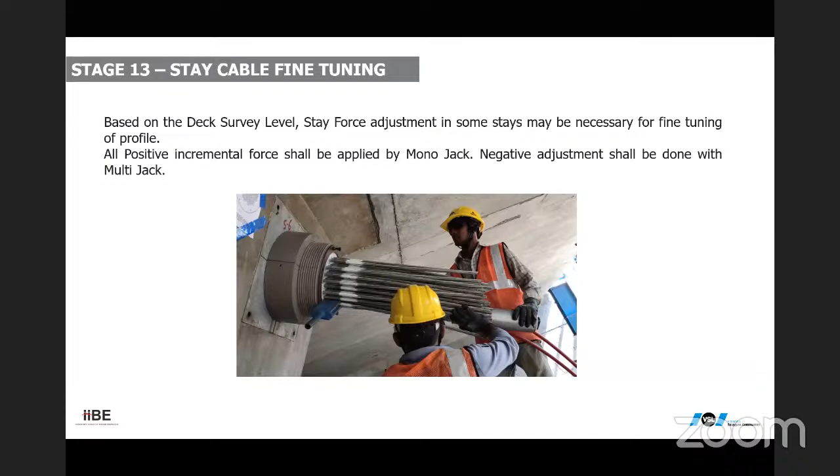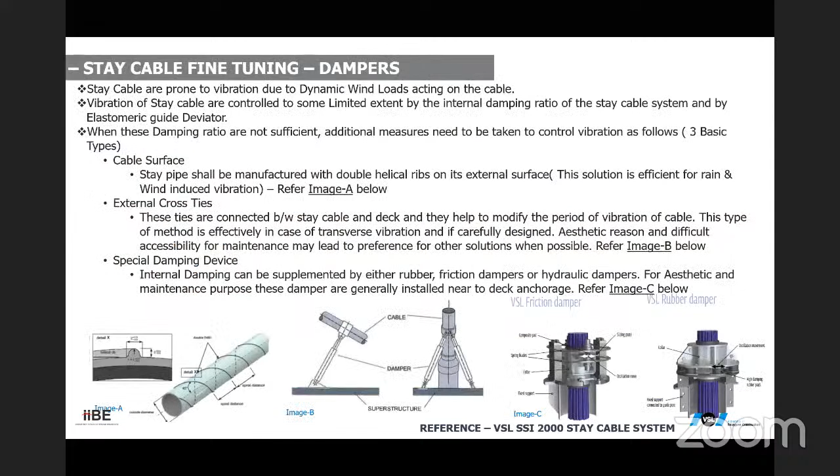Finally, you have stay cable vibration to handle. Stay cables are prone to vibration due to dynamic wind loads acting on the cable. Vibration of stay cables is controlled to some limited extent by the internal damping ratio of the stay cable system itself and by guide deviators, which I showed, for taking any angular deviations introduced into the anchors. When these damping ratios are not sufficient, additional measures need to be taken to control vibration.

For the cable surface, the stay pipe shall be manufactured with double helical ribs on its external surface. This solution is efficient for rain and wind induced vibration. Below you can see on image A an example of such a stay pipe. External cross ties are connected between stays and deck and they help to modify the period of vibration of the cable. This type is effective in case of transverse vibration. Aesthetic reasons and difficult accessibility for maintenance may lead to preference for other solutions when possible.

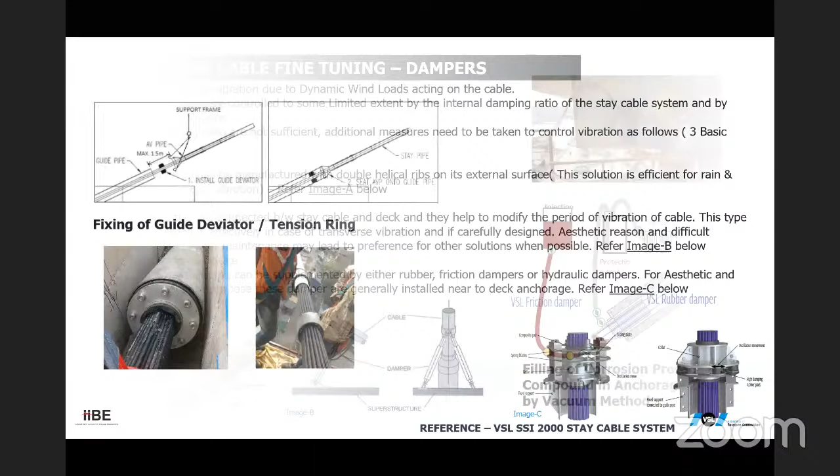So once that is done, you come to the finishing works. As you can see here, we still need to install certain protection devices, which are the guide deviator tension rings. These will help prevent vibrations entering into the anchors. Once that is done, you fill corrosion protection compound in the anchorage by the vacuum method. Here the corrosion protection compound is being filled in the anchors.

And if you are using saddles, then you have to fill similar corrosion protection in the saddles. Here's an example of how the saddle is filled with corrosion protection compound, and then the pipe is seen at the saddle location.

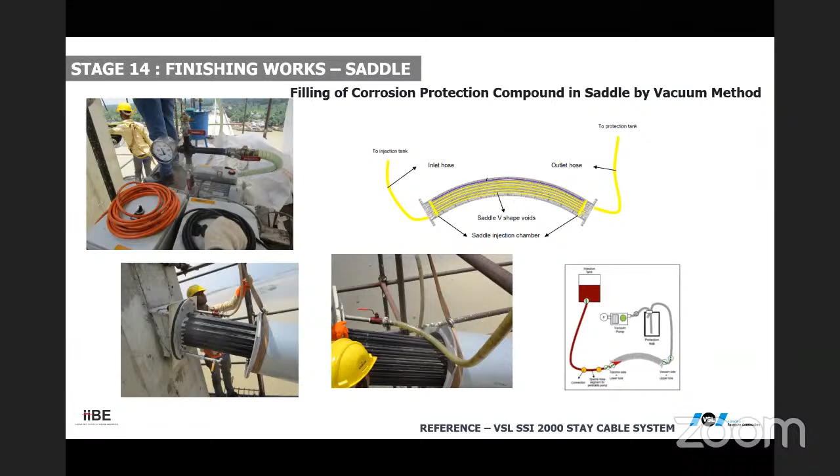Hello, I think it's almost come to the conclusion. And again, I hope it's the last interruption of this internet instability. I think we'll just wait for him to come back for the conclusion. Yes, sir. Is he joining back? Yes, sir, he is joining. So meanwhile, by the time he joins. Yeah, he joined, sir. Okay, fine. Thank you. Yeah, Mr. Bassista. Yeah, okay, sorry again. This would be the last time probably because I reached the conclusion, and as fate would have it, now it will never get disconnected. So now it would continue like that.

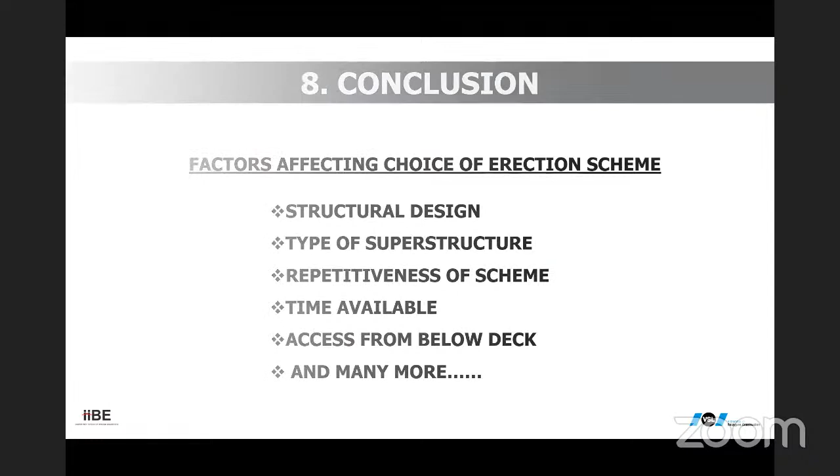Time available, and of course cost is also a factor here, time and cost. Access: you need to work out access from below the deck. These are very complex structures, so you can't limit it to only these things. There would be many other possibilities. So that brings us to the end. So here are references and credits.

Some of the slides that we used here, all the companies, all the people who are behind these wonderful projects that we presented here, and I'm proud to present my team here. It's always about teamwork, so I'm not alone. I am supported by my colleagues here, Sumaya Sheikh and Shiva Kumar Balachandran, who helped put together this whole presentation. So thank you. I apologize for this, which was not in my control today, but hopefully it will be better some other time. Thank you.

Thank you, Bassista, for an excellent presentation, but for the interruption of the technology, the internet connection, which is not in your hands. You have explained everything, all the nuances as well as the subtleties of the construction, including the erection, free cantilever construction, balanced cantilever construction, both for the extradosed bridge as well as the cable-stayed bridge. It's very, very interesting. And I again repeat, it would have been more interesting but for the interruptions.

And before taking the questions, I'm sure that our panelists would like to add to or complement your presentation with some of their words. I request Mr. Atul Bobe to say a few words about this presentation, and if he wants to add some more points out of his experience of constructing cable-stayed as well as extradosed bridges. I know that recently he has completed that bridge there in Goa. That's a beautiful bridge, which I have seen. And Mr. Bobe would like to add something.

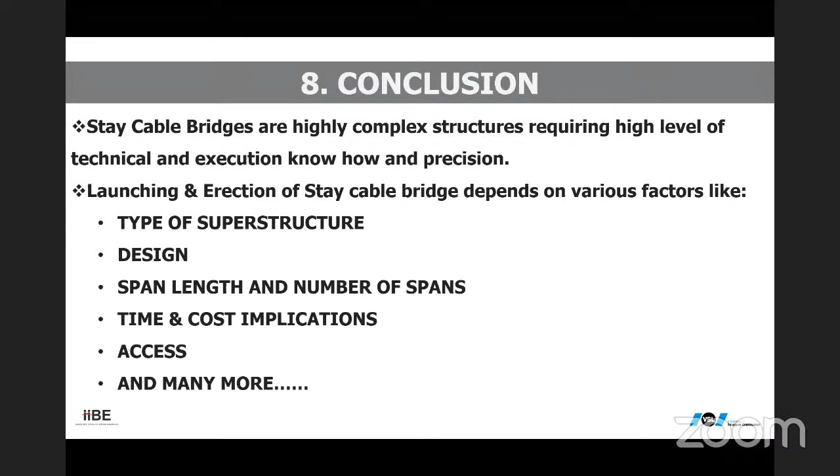Yeah, a couple of things. First of all, wonderful presentation. And like Mr. Hegde said, but for the interruptions that you had because of the internet. But I think that's something that we have to live with. It's called the new normal, I guess. Interruptions of technology have become the new normal, so we have to accept that. But other than that, I think it was a wonderful exposition of cable-supported bridges.

A couple of questions come to my mind, of course, in addition to whatever you have said already. It would be nice and interesting to know, for me and for the attendees as well, I guess, how does one really select, because of the plethora of cables that are now available in the market. How do you make a choice between a saddle and an independent cable? I think that's one of the key questions that every designer and maybe even the construction engineers face when you really come to designing the bridge.

How do you make a choice between the saddle and any other cable, between an extradosed bridge and a cable-stayed bridge? That's the second question that comes to my mind, and that is always at the back of my mind if I am designing either an extradosed or a cable-stayed bridge. The third thing is, what's the difference between a manufactured camber and a construction camber? You used both those words, and I would like to know what's the difference between these two.

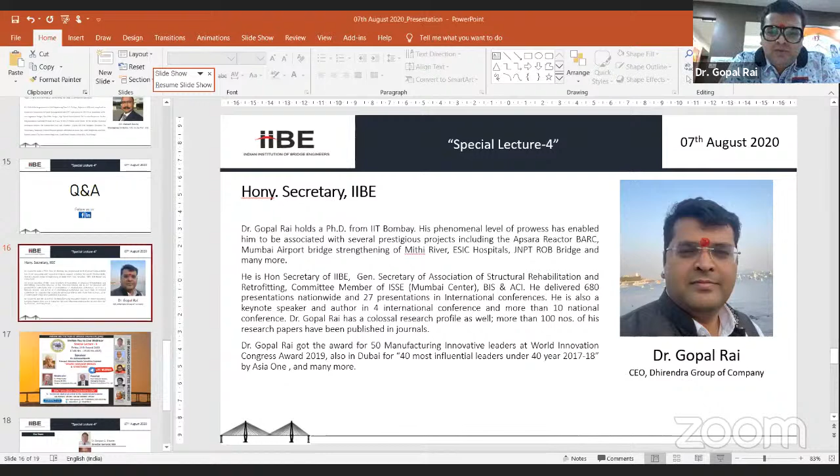Yes, thank you, Gopal. So friends, first of all, let me compliment Mr. Kailash Bassista. I was hearing all through, and of course you also were. Some of you I know have complained of the voice quality, and now let's see how recordings can be given. But the kind of speech he had, it is like he's standing at the site of the same bridge and telling you from there what you should do. How cables move, how stressing is done, how the cable would look like, everything is from his heart and from a very live angle of his work that he has done.

I have known this calm and quiet gentleman for the last about 15 years, and of course VSL all the time. One knew that he had a good knowledge, but didn't know that he'll become the MD of VSL India. And he has quietly attained that position. So thank you, Mr. Bassista, and my compliments to you.